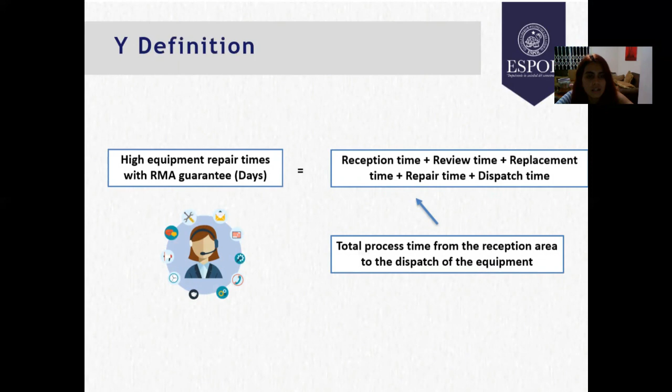In the Y definition, we have a high equipment repair time with RMA guarantee in days. Here in the implementation plan, we have two Ys. And here we have the improved simulation.

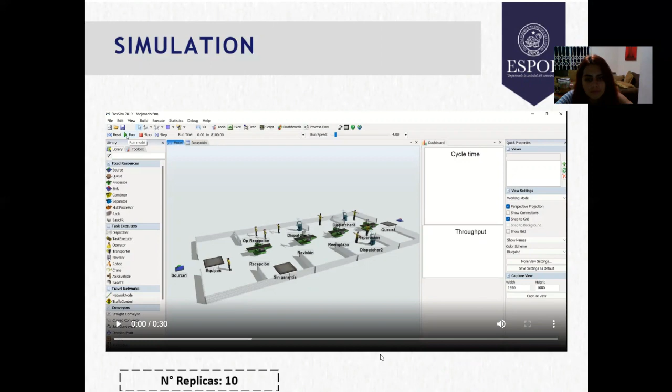In the second time, we have that for the improved in FlexSim, we were able to reduce the time from 5.81 days to 3.78 days, reduced by 39%. Thank you.

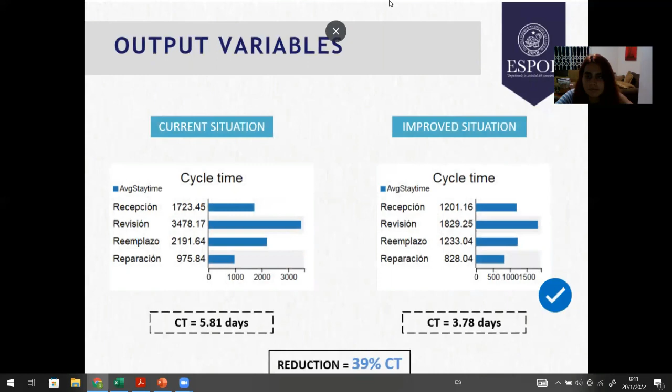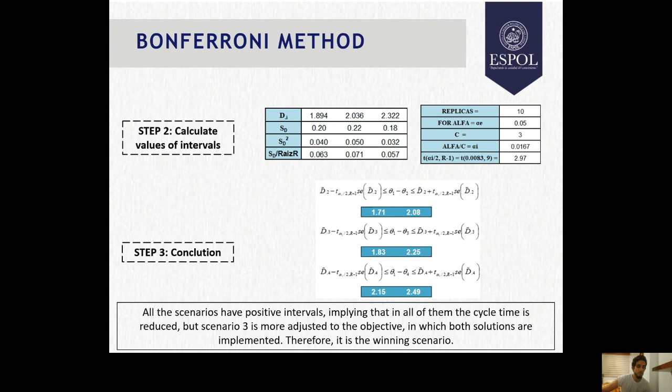The Bonferroni method. Step 2 is to calculate values of intervals. And then we conclude that all the scenarios have positive intervals, but scenario 3 is more adjusted to the objective. We have the current situation and the improved situation. After we implement our solution, we have an increase of 200% of throughput and 17% of average increased use of operators.

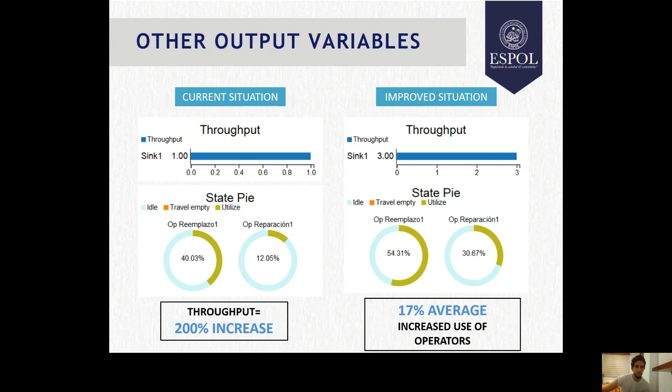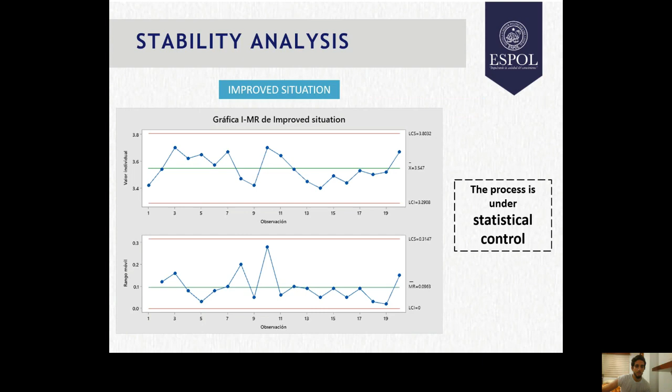Okay, we realized the normality analysis of the current situation, and we conclude that the data have a normal distribution. The process is under statistical control. This is the capacity analysis, and we conclude that the CPK is greater than 1.33. Therefore, it is a process that is statistically in the world-class range.

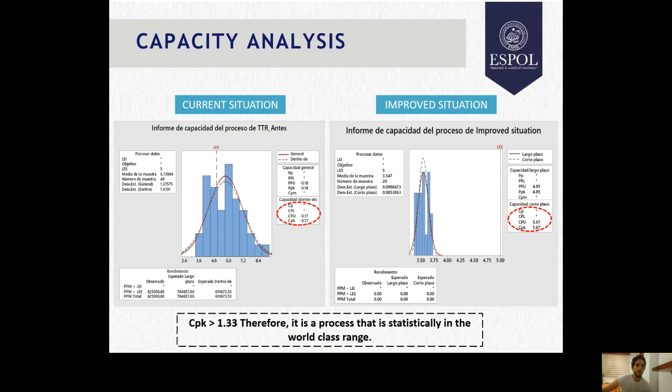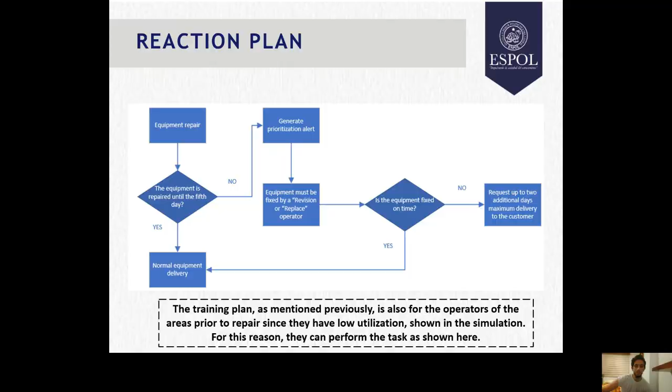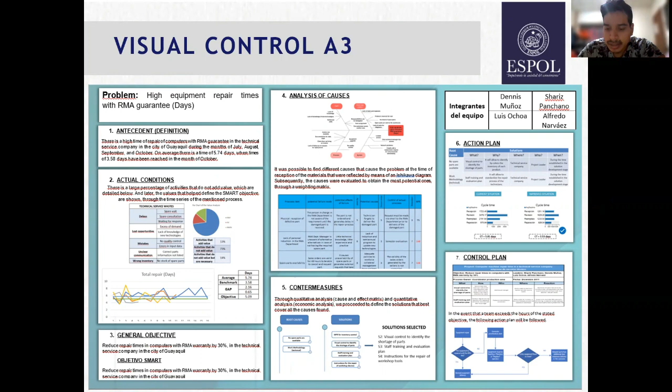Here we can observe the visual control tool A3, in which we present the problem, the definition, the current conditions, the action plan, and the control plan. Continuing with the agenda, we have the current situation simulation. Here we can observe the verification made of our simulation in FlexSim by the engineer Joshiro, and at the bottom, the process flow.

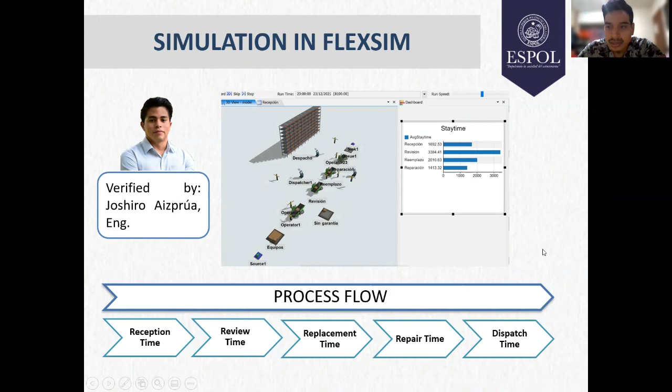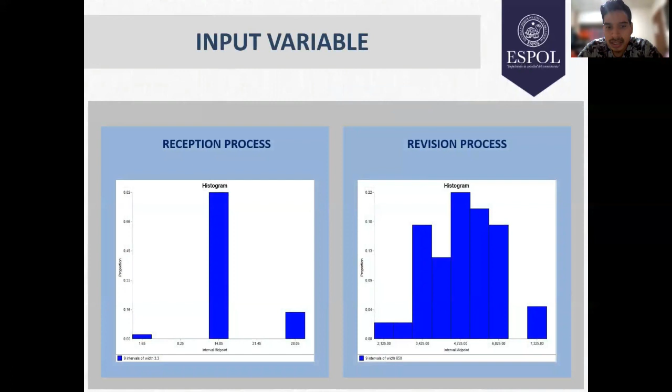Here we have the dashboard presented in FlexSim with the times of each process: the reception, review, replacement, repair time. Using FlexSim, as you can see, we have 5.9 days in our cycle time. Then we have 4 charts that show the variability of time of each of our processes.

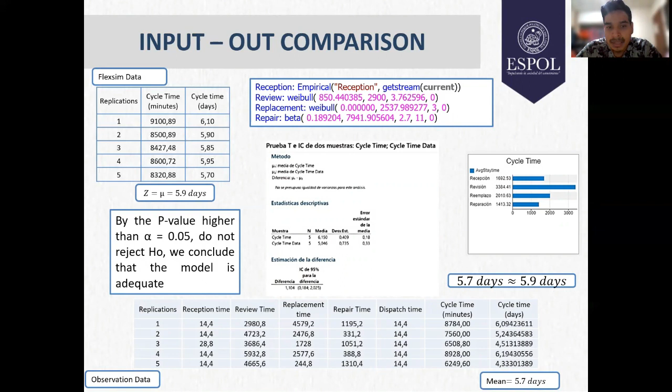Here we observe the comparison made between the data given by FlexSim and the observed data. And by that, we need to analyze if the average cycle time is the same or if it's different. That's why we apply the hypothesis test, in which the null hypothesis is not rejected. It says that you don't reject H0. So the FlexSim model is suitable. And finally, we have the power test, in which the sample size is calculated, which in this case is equal to 10.

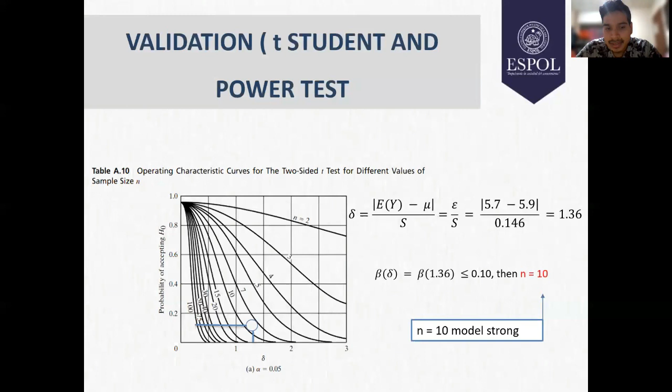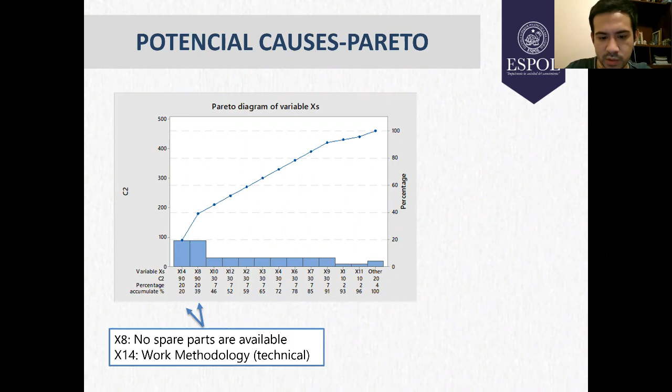Proposed solution. In this particular diagram, it can be seen that no spare parts and work methodology are the root cause of the problem. 4 solutions were proposed: MRP, visual control, staff training, and instruction for repair. The economic analysis: in this part, the implementation of each strategy to be developed was costed. An impact-effort matrix was made, where solutions 2, 3, and 4 were chosen.

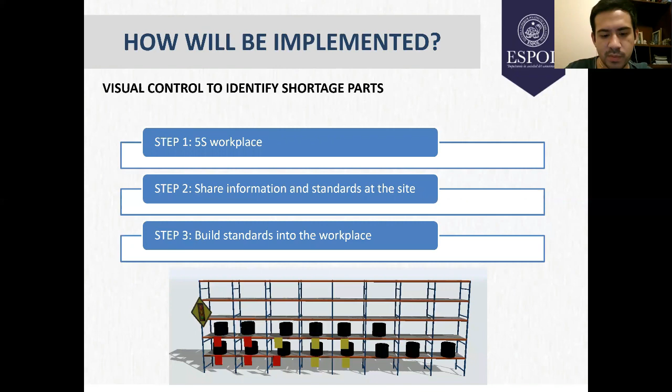The implementation plan: this was implemented to affirm the root cause, and 4 solutions to this problem were proposed by making an implementation schedule. The implementation schedule is detailed with activities, start date, and end date. Visual control identifies the amount of inventory by means of cards. Staff training is used to improve the performance of operators. There are other conclusions, and there are recommendations.